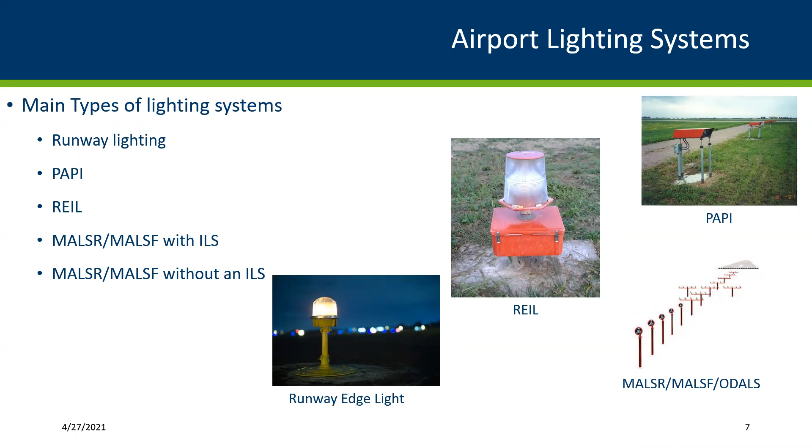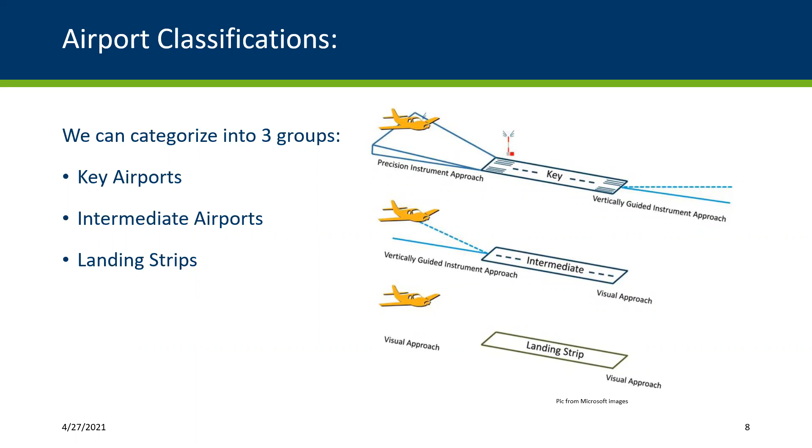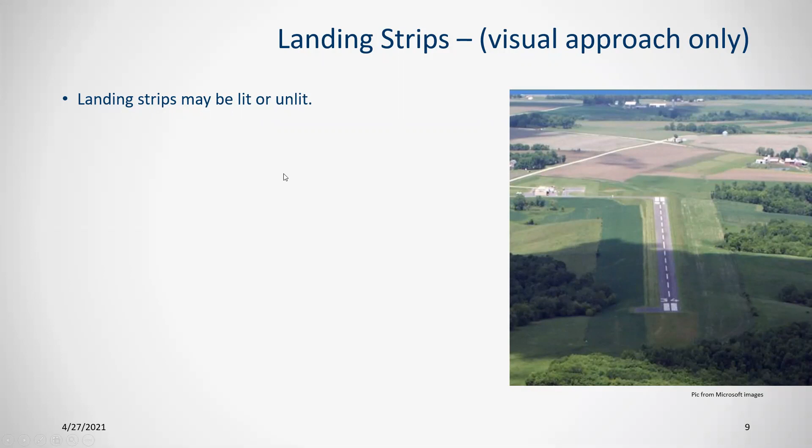So landing strips, visual approach only. So they may be lit or unlit. And with that, them being lit, they could be something that's ground mounted and permanent, or they could be more of a temporary stake lighting. Oops, I apologize. I got to go back. I missed it. There we go.

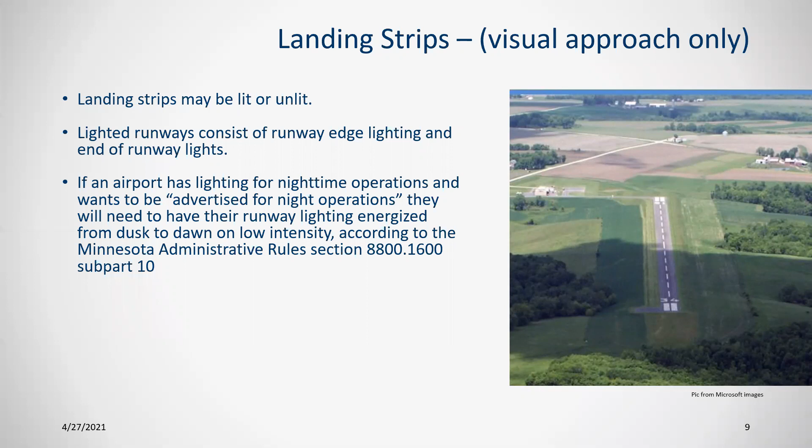Lighted runways consist of runway edge lighting and end of runway lights to light it up in the night. If an airport has lighting for nighttime operations and wants to be advertised for night operations, they will need to have their runway lighting energized from dusk till dawn. And that comes right out of our Minnesota administrative rules that coincide with the state statutes that govern our airports for our state. So it's something to think about. If you want to be advertised for night traffic, you got to have those runway lights on low intensity.

Oops, did it again. Okay, lit runways will also require a rotating beacon and a lighted wind cone. And that's according to FAA Advisory Circular 150-5300 there. And the advisory circular goes hand in hand with what's being required there by the state rule. So basically they're tied together. If you have that perimeter lighting, you're probably going to have, in most cases, the rotating beacon and lighted wind cone.

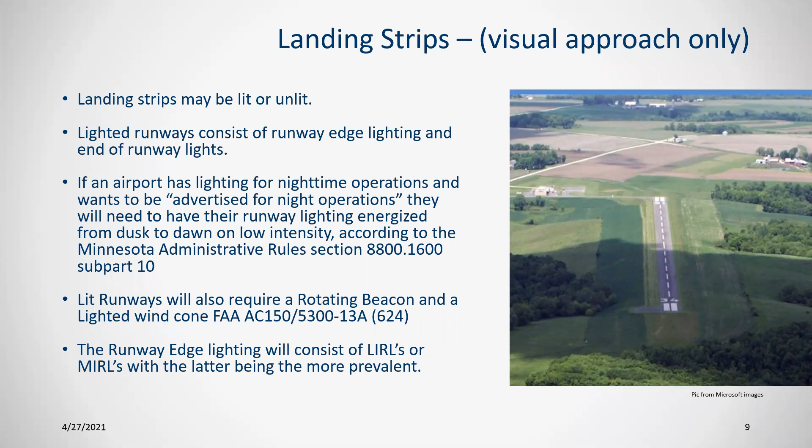Runway lighting, edge lighting will also consist of LIRLs or MIRLs, with the latter being the more prevalent. So those MIRLs are going to have multiple settings on them to bring up the intensity or brightness of the light. We'll get on into that on this next slide here. LIRLs are energized at dusk with a photocell. So I guess LIRLs and MIRLs would be covered under that.

But MIRLs have a distinction there, being that they can be controlled by that pilot radio control, so that if a pilot's approaching, they can bring up the intensity of the lights to bring their attention to their landing strip, and it will remain on in the lower of the two settings. So that's the MIRLs.

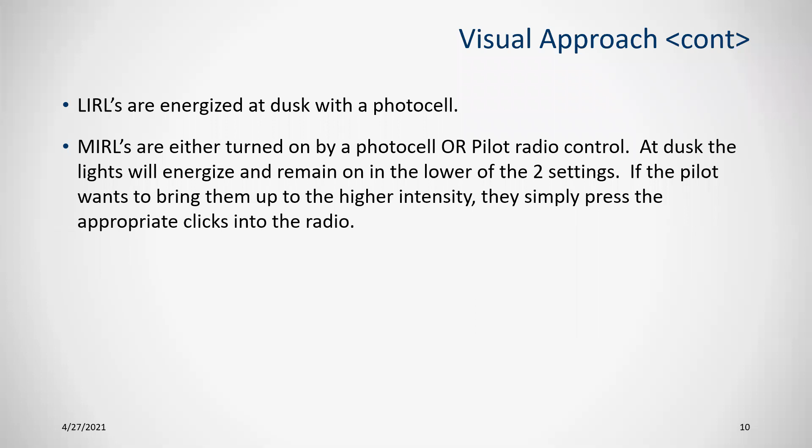Getting into the intermediate airports. This is the most common airport in our state. I think, yep, Mike and I were talking about this yesterday, and it's 80 some airports. Most of our airports are in this class, with us not having as many key airports like our metropolitan areas, and the landing strips being also the smaller group.

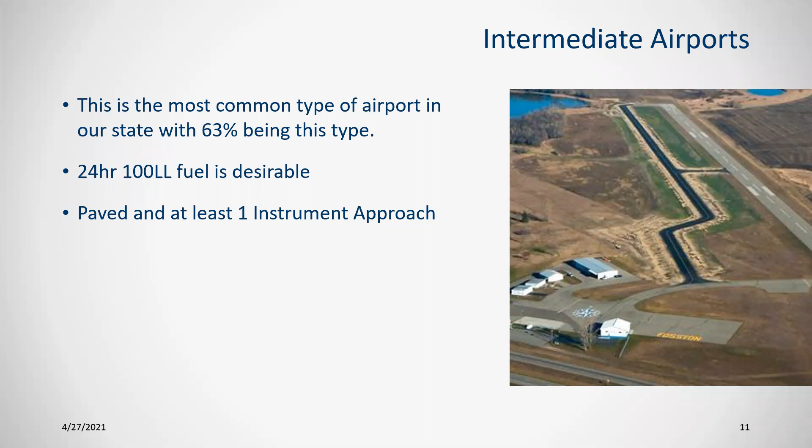Out of our SASP, 24-hour 100LL low lead fuel is desirable typically at these intermediate airports. So a lot of times you'll see that. Pilots can land in the evening, get fuel if they need, and take back off. And we're going to have paved runways and at least one instrument approach like you saw in that graphic. And these intermediate runways are also going to have an expectation that they'll have PAPIs and REILs at them. And here we have a picture of our Fosston Airport, some of you may be familiar with, up by my neck of the woods.

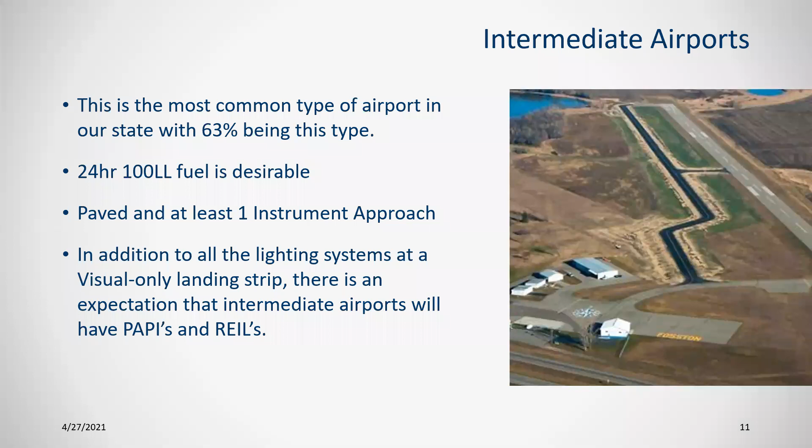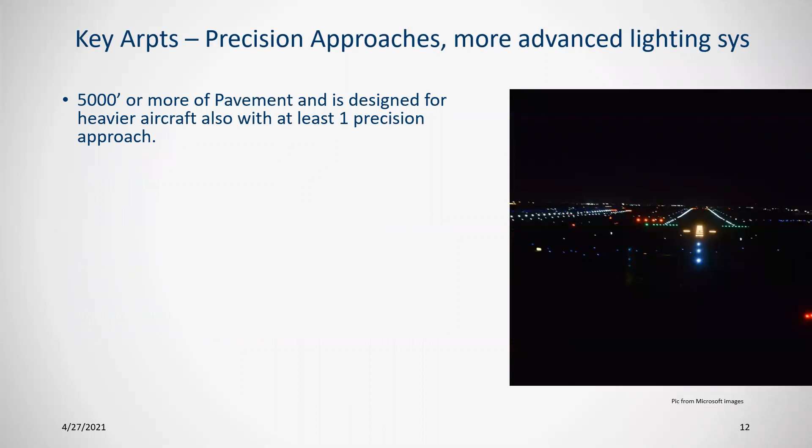Okay, our key airports, what can we see here? 5,000 or more feet of pavement and designed for heavier aircraft, and at least one precision approach like the graphic had there. And typically those MIRLs will be upgraded into high intensity runway lighting. So a little bit more functionality there with 5 settings as opposed to typically 3 settings on those MIRLs. So different intensity levels available on the HIRLs.

And the key airports may also have an approach lighting system of some kind. MALSF or MALSR being the two more common of the many different types of approach lighting systems. And as I mentioned before, there's a distinction. If you have that instrument landing system, with that MALSF or MALSR, you're going to need a special yearly inspection by a technician with certificate of authority in order to maintain compliance. So we want to keep up on those systems.

There's a new gentleman that's working down at our district office in the FAA, and they're starting to keep track of this a little bit more. So we definitely want to keep on top of our lighting systems so that we don't have to shut them down for repairs or compliance checks. So we could circle back to that at the end during the Q&A if anybody has any questions on that. I know Mike's got a good grasp on that as well.

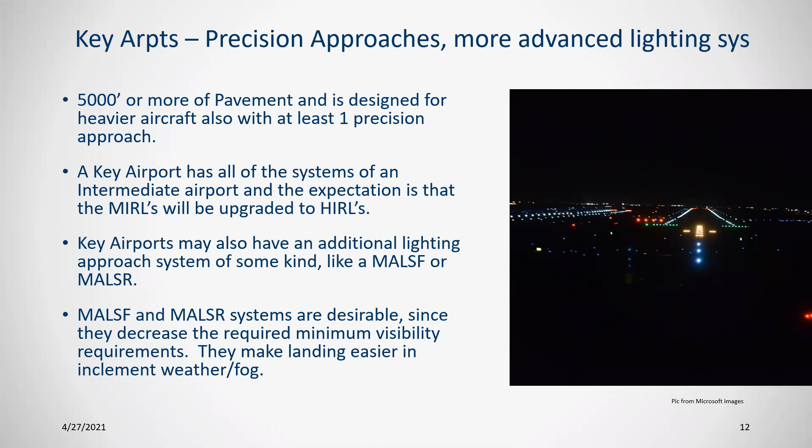There is an aviation A to Z, and we can take a look at it. It's an important tool to go onto our website if you're an airport manager or city staff, and you can understand our views on funding and all sorts of different things, whether it's regarding repairs or additions or anything like that. And I have a sample of our website here on the next page. Just shows what it looks like.

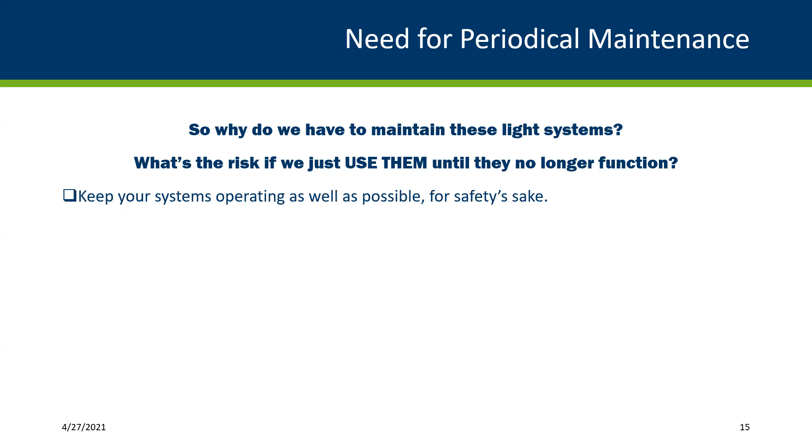And if a pilot-controlled lighting system is unusable, it may create hazards, especially if they don't know about it. So skipped assessments like this of lighting issues tend to snowball into greater problems. And we just want you to think about it and take pride in how well you keep your airport maintained. The first impression that people get when they touch down, I see it says town down. I apologize. Oh, to your town when they touch down. So it could be business class that have come in on a business flight and they have business in your city. They come in the evening and half of our nav aids aren't working. It just might put a sour taste in their mouth about what they're going to see when they enter the town.

Because if we do get a short in that wire and it shorts through the can on that light fixture, whether it be in runway edge lighting or anything like that, a threshold light, a taxiway light, it just provides an opportunity for a hazard to happen. And those shorts are going to find their way home to try to keep the circuit complete. So if we can catch it earlier, a lot of times it will be a lot less catastrophic. There won't be a short circuit in the field that wrecks some electronics or wrecks some light fixtures themselves. So we want to try to stay on top of that.

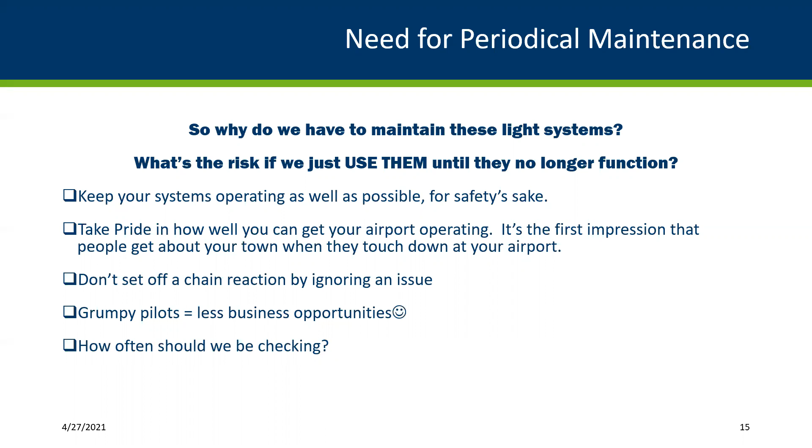So in our lighting maintenance plan here, I will go through some of what the FAA tells us about how often we should be looking at these things. And they have some charts, and in our templates, we'll try to extrapolate the different charts that the FAA gives us. And we're going to try to build a form that's easy to use, like I aforementioned, and we can take it out in the field, do a report possibly.

And if it's John Jones that does it the first time, and it's Casey Carlson that does it the second time, and Mike does it the third time, the form's going to look the same. You can put it in a 3-ring binder and keep good track of what your navaids are doing. So we'll take a look there.

A lighting maintenance plan is a tool that we can use to assess our status, determine if we are meeting the design standards. And then I mentioned before about trying to track things or find things before problems arise. And it's going to save us money, because something breaks down and it affects other stuff on the circuit. And if we could have caught it earlier... our maintenance costs are going to be more when we have to call a contractor out to the site.

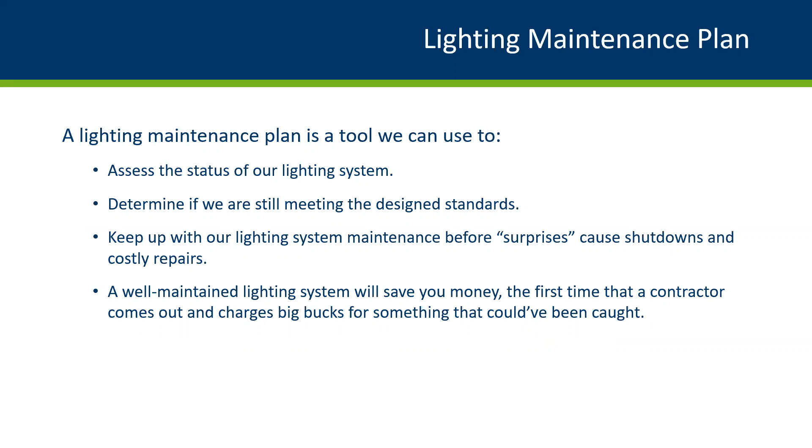So let's take a look at a few points from that FAA advisory circular. And this is right out of the advisory circular from 2014. And it kind of gives you a matrix or an idea of what the FAA is expecting us to be doing as far as how often to check certain things.

And if you look at that last column there, it's unscheduled. That's just telling us, for a runway elevated edge light or taxiway edge light, go out and check that stuff as often as you can. But it's not mandatory to do it within a certain frequency of time. Some of you folks probably are checking these more often than what the minimums are, and that's great. But we're talking about the minimums here, so we want to make sure to hop in the vehicle and take a cruise out and make sure we're looking at things.

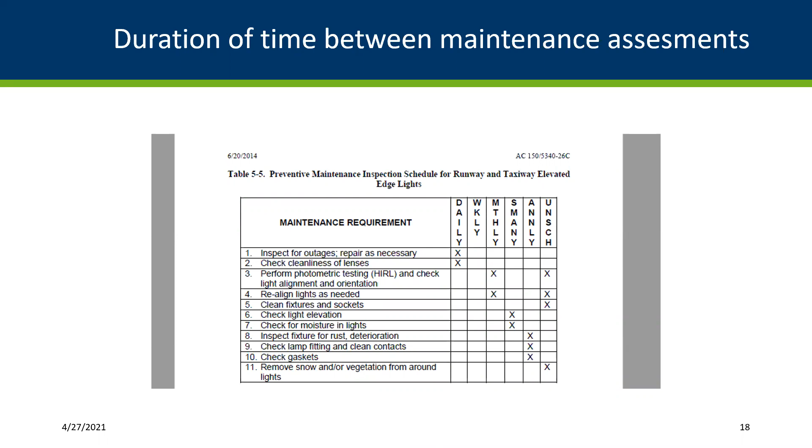The key again being just to document this. If you take a drive in your vehicle out on the field, and you're going to take a look at the condition of your system, and you think to yourself, well, let's see here. Light number 15 had a missing globe. Light number 17 had a bulb that was cracked. If we just have that simple 1-page form, and we can mark it down, we won't have to try to use memory when we get back to try to think about ordering parts or lining up a service request.

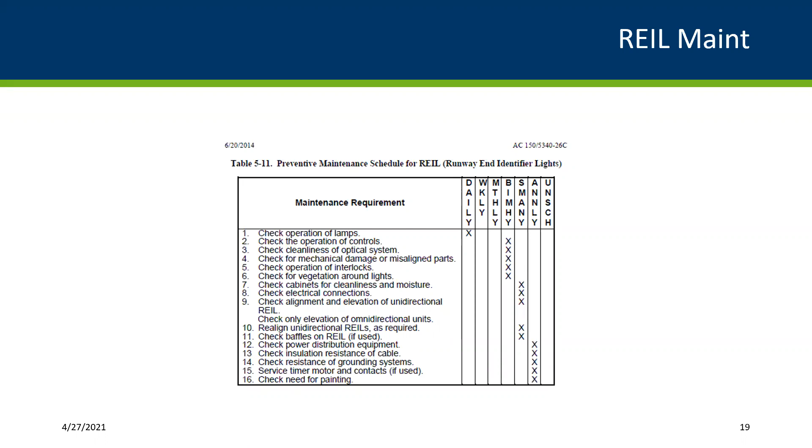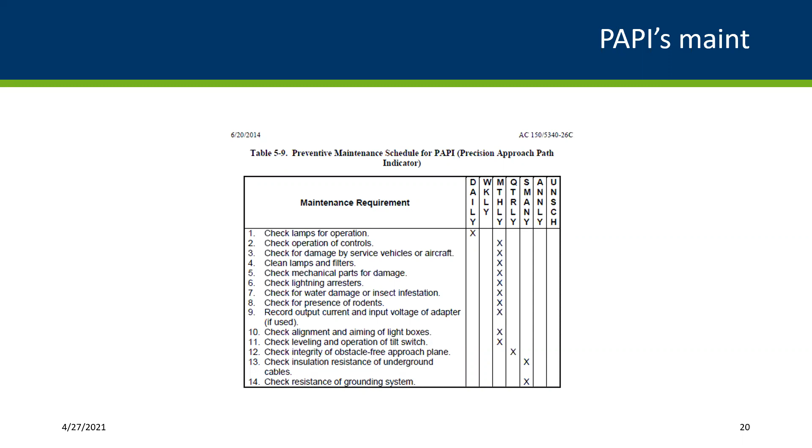I wouldn't say that it's chock full of brand new information. It just more so spells out what the processes were, what we were already doing. So we'll take a look at a chart out of that. So right here is just what I pulled up out of this new order that's come out from the FAA, and it deals with the VASI and the PAPI lights, whichever you have. And if you'll notice here, in the standards and tolerances, that's going to tell us, when it was originally commissioned, where did we expect the tolerances exactly to be at in order to be compliant for the flight check.

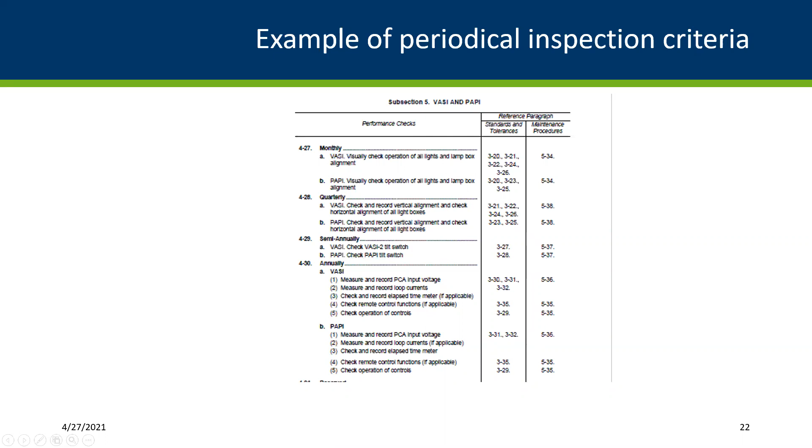And if you'll notice, bullet point over here for section 5, subnote 34, it says visually check operation of all lights and lamp box alignment, and then going down here, it's talking about things like the tilt switch and such. And if you go to that section 5-37, which I have in the next slide, it's going to tell us about that tilt switch adjustment and give us more detail on what we need to do in order to do it properly. So just in summing that up, it's adding information to what we're already doing and giving us a better idea of what the expectation is for it.

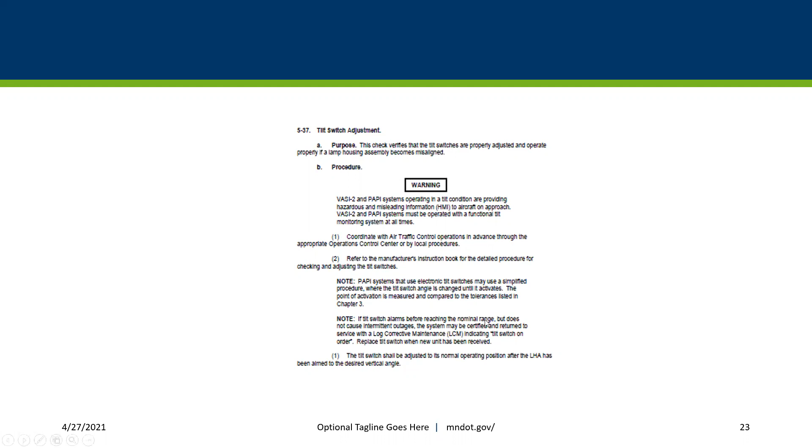Okay. So the templates, if you'll excuse me here, I'm just going to take a quick drink.

All right, I've been reviewing the FAA info, and I talked some about what we were putting together for these templates. They are in Excel format, and it'll be nice to be able to customize them for what we have. Some guys at an airport might say, well, I don't like that. That needs to be this, or we can add something to it and make it better, or whatever. But it's something that we can customize, get it how you want it, and then just keep it as a form on your desktop when you want to print out a maintenance sheet. Simple, you open it up, print out a new copy, and you've got it for your binder. And then we talked about no matter which staff member does the report, it's going to look the same. Just the signature will be different. You're checking the same boxes.

And these templates are in progress. I've been working on one for the REIL and one for the runway edge lighting. And I hope to have them completed soon. I don't have them all the way done yet. The plan is late summer, early fall to have them ready so that whatever lighting systems you have at your airport, you can contact our department. We can just send you over a few files and you can use them. So again, it's not mandatory that you take up our maintenance plan, but we would suggest it on a number of fronts that I've been covering here.

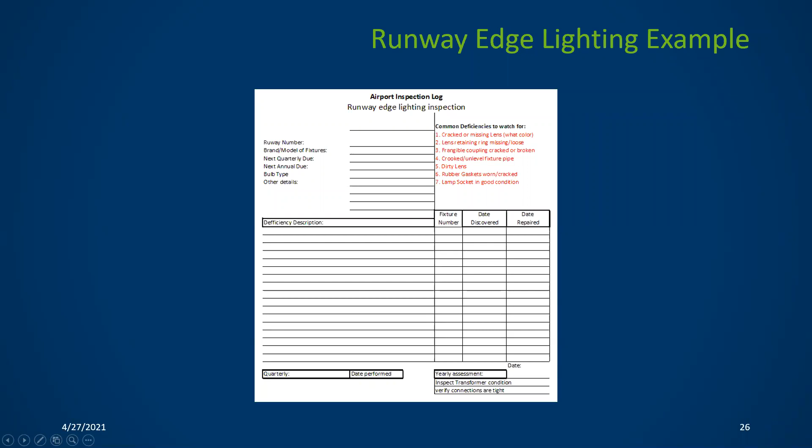column right over here. And then the date you discovered it and the date you repaired are going to be huge. It helps to give us some accountability. If you see something was damaged or needed replacement or repair back in February, and you get to June, July, and you haven't done anything with it, well, that's probably not a good thing. So I want to work on these forms along with my team and get it so it's just a tool. And I think it can be helpful for us.

Okay, so we did find something that broke. What are we going to do? What needs to happen with it? So is it something simple that the airport staff can take care of, or do we need to get in touch with somebody on it? How big of a problem is it?

We want you to feel comfortable calling us up if you have something you're not sure about. Among our department, we've got a lot of experience, and we may be able to help you get something up and running faster than what you hope. So please use us as a resource.

Again, just wanted to touch on safety here. If you are out changing bulbs or think you're going to make a slight repair, just remember that series high voltage circuit that's out there for your runway lighting, your edge lighting, your taxiway lighting, those PAPIs. Especially if you had a short in that circuit and it was working extra hard to keep that circuit operational, we're going to have a lot of voltage running through there. And even if you have some systems that are turned off during the day and you think, well, I'm safe because the photocell's not going to turn that whole circuit on.

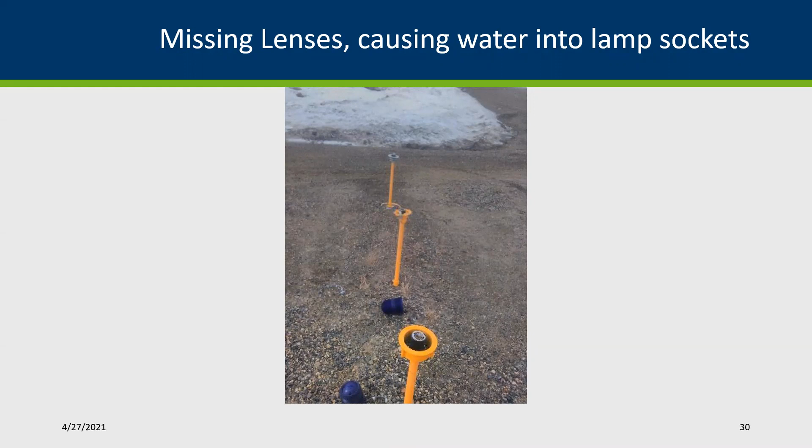So here we have a picture I found on the web, and we've seen this out at our own airports. I've personally been to an airport and seen some of these globes missing. If the retaining ring starts to slip or come off of those flanges, eventually that globe is going to start to jiggle on there a little bit until ultimately it just falls off. And of course, as soon as it falls off, it's no longer keeping the moisture out. It's a moisture trap. It's catching moisture now, and you're getting water into your light sockets. And this is one of the things I talk about that can be a chain reaction. One fixture can start wrecking the next one just through a short in the circuit.

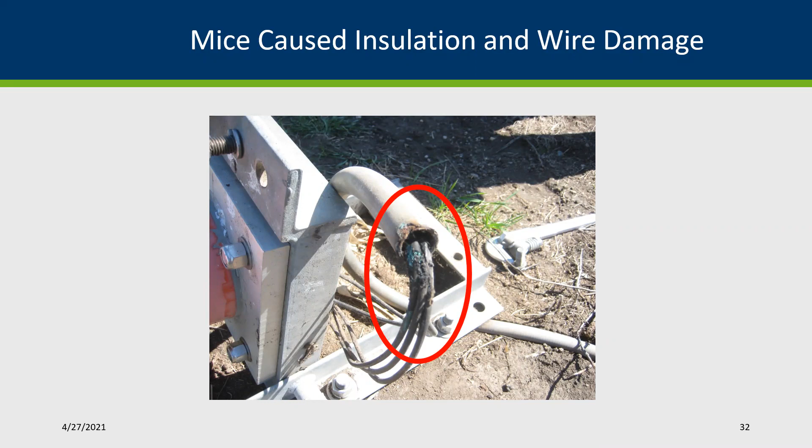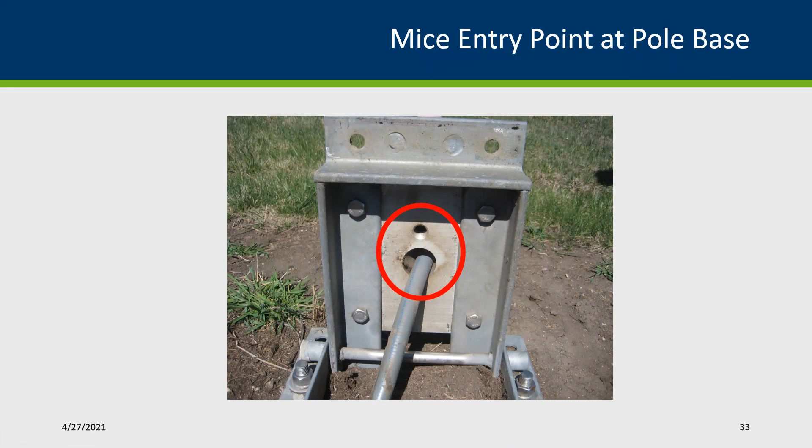And here's a picture of, it looks like either a beacon or an obstruction light of some sort that's been tilted down to take a maintenance assessment. And here we see these wide holes here. And of course, our electrical code is going to state, generally speaking, that we've got to plug all these holes. It's amazing what mice can get up into. And so just plugging and sealing is going to help our components last a lot longer.

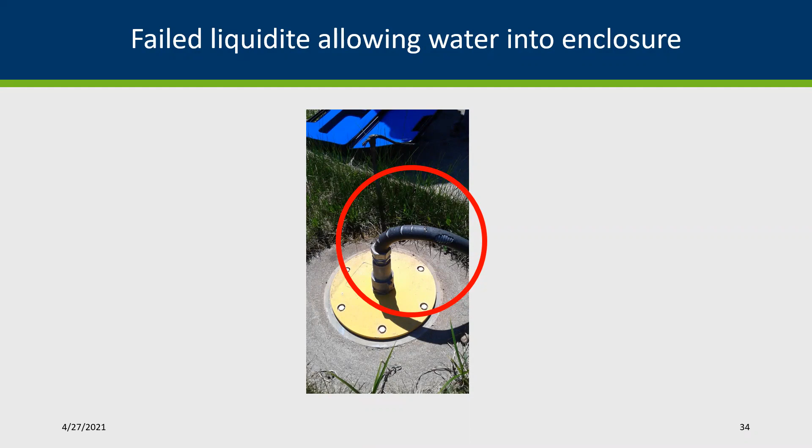And here we've got almost the same issue. It just was caused by something else. It wasn't the sun baking on it. This was, you know, a squirrel or a mouse or something that got up here and thought he was hungry for some rubber PVC jacket. So again, we're thinking about letting moisture in there, just right at this crack at the bottom here.

If you think about all the surface area, if this is the high point, the moisture is working its way down, and it's going to get inside that crack. It's going to sit right here on this lip until it works its way in here and fills this canister. So we definitely want to address issues like that, take care of it before it becomes an issue.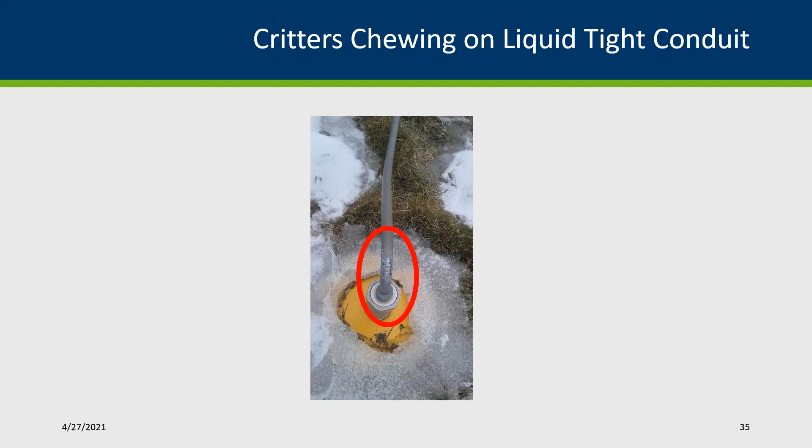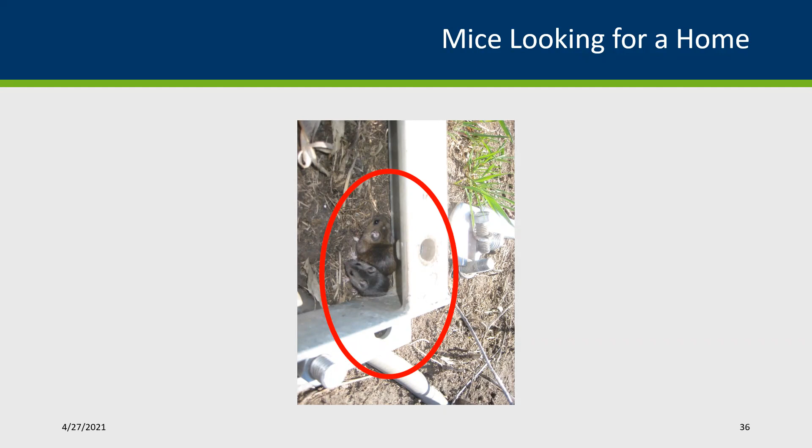And here's a picture of our little friends here, disgusting little buggers. They want to have a home too, I guess. And if we look here, I've just got a picture of weather stripping missing. And so our weather stripping is something we want to keep intact to keep the moisture out.

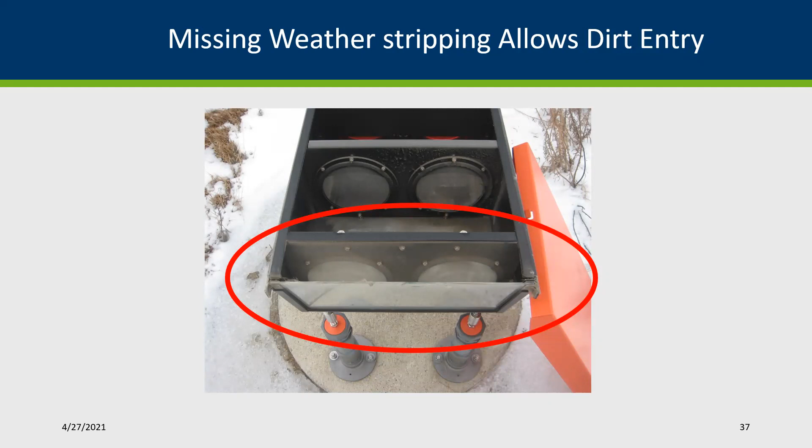Staying on top of our maintenance can make all the difference. We want to prevent those outages, and those long-term outages can be costly. So try to avoid it if you can. Just running up to the end here. I got 4 or 5 more slides, so we're about wrapping up.

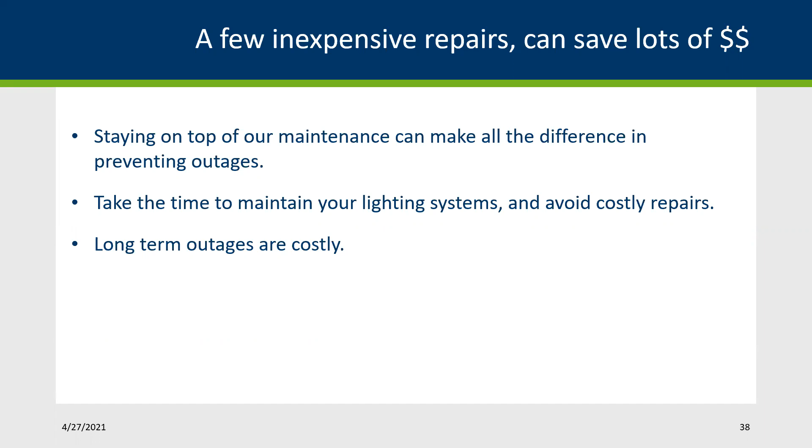One item we want to talk about is our purchasing contracts. We've got some contracts in the works with ADB Safegate and Airport Lighting Company to get some contract pricing in effect. And what we want to do is try to lock in some good pricing so that an airport manager can call to those companies and say, hey, what's my price on this? And typically we can get 10% off, and it's easy, it's quick, it's seamless.

And it also allows us some versatility, because if we have these contracts in place and you had more than one company making a certain component, you can just order right off the list and not necessarily get the cheapest or whatever's available, so to speak. So we want to get that pricing wrapped up as a great tool for airport managers to be able to order something when they need it and not have to go through a solicitation process.